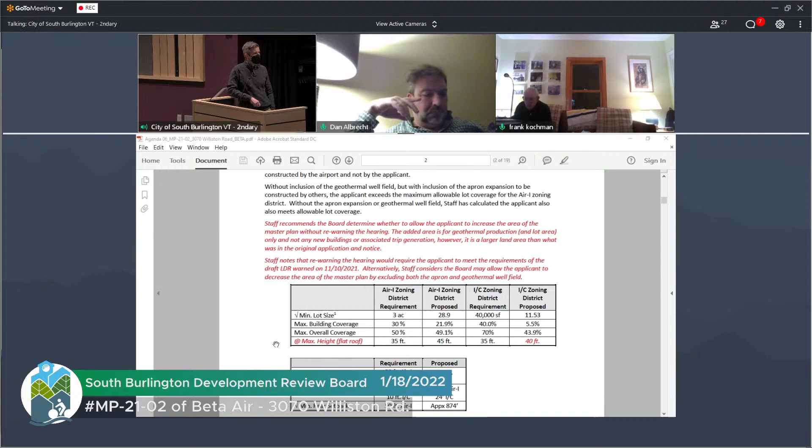I guess, and that's a really good question. My question in parallel to that is, what constitutes a material change, and does the well field actually represent a material change? There's no building. It's all underground infrastructure. Nothing can be built there. It seems that there's an unusually high burden being placed on this element of the project being material.

And that seems to be the cleanest path forward, to move in the direction which was intended with no impact to any of the other regulations we're trying to support. It should be noted that in trying to create a net zero, very sustainable building, the geothermal heating and cooling system is way above and beyond what any normal project would do.

I do have some calculations that are slightly different, Marla, but I would still ask you to try to understand what is material in this instance, because it doesn't seem to pass that traditional material test.

Yeah, I think that gets to the crux of the question, Art. I think that's well phrased. So board, what are your thoughts? How do we get this to a passable condition?

Well, look, the environmental court has been pretty generous in allowing what looks like a pretty big change as immaterial. The question for me is, what is the purpose of the warning? The purpose of the warning is to let people who might be interested persons know what's going on. Is there any other purpose to the warning?

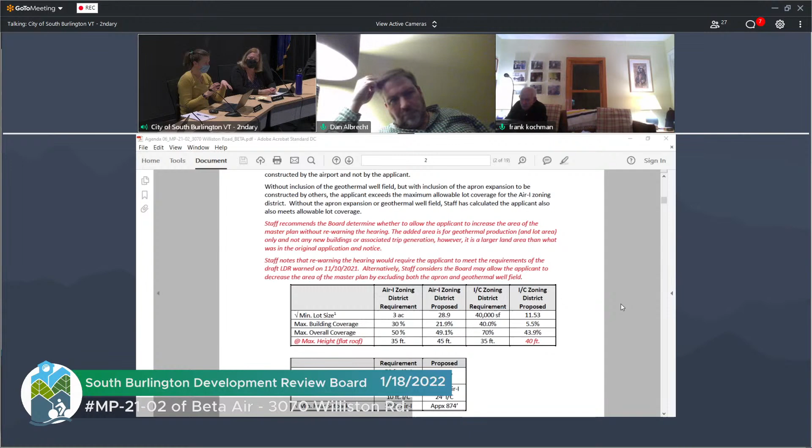Right, because underground it remains around 55 degrees. It's like a thermos, like a radiator. You pump the water down, and it gets hot, and then it rises, and it heats. Fundamentally, you're taking groundwater, you're heating something in this pipe. It's a closed loop system relative to the temperature of the ground. Depending on the time of year, that fluid is going to be warmer or colder than the environment. And it's used to either cool or add heat. It's a closed loop system.

All right, and I'm happy to... go ahead, Frank. Frank, did you start to say something? I've got something on this, Frank, if you can pass the baton to me.

Sure. I guess one of the questions is, when things are warned, it's not only about the presence of a physical building, it's also oftentimes people are more worried about construction activity. So I get the point that in the end that stuff would be underground and not that visible, but there will be construction activity. That's the other thing neighbors often say - I don't necessarily mind something being built here, but can you not work on the weekends, or can you watch the blasting activity or whatever? So I think that's the other standard we have to think about in terms of adequate warning.

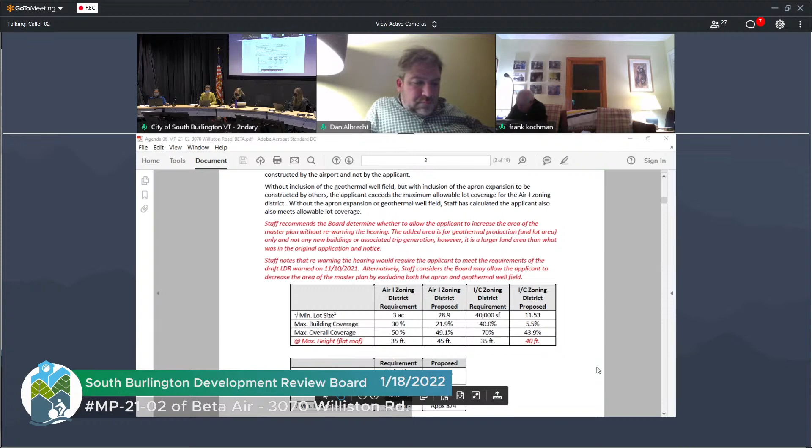I agree with what Frank just said, with the caveat that I think it's sort of an impact that's different than the proposed change here. It's already been warned about this project, so people are on notice of the project. It's whether this change would make a different impact. And I'm not sure whether this helps or not.

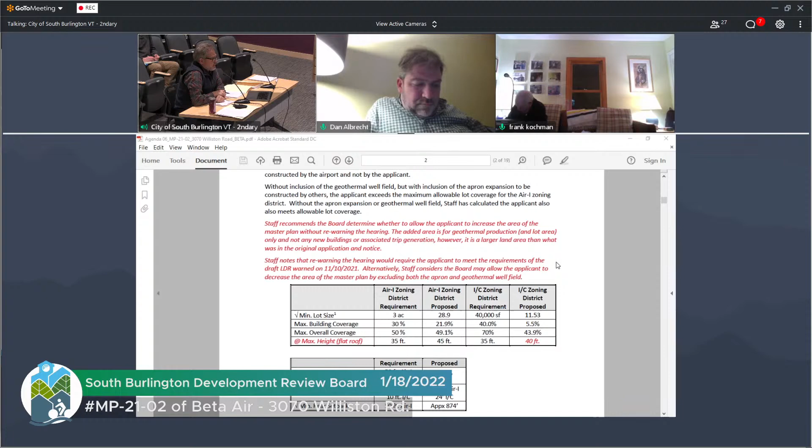The geothermal well was warned under the preliminary final plat, SD 21-28. In the location that it's in? That's correct, yes. So we didn't mention it in the warning, and I don't think that...

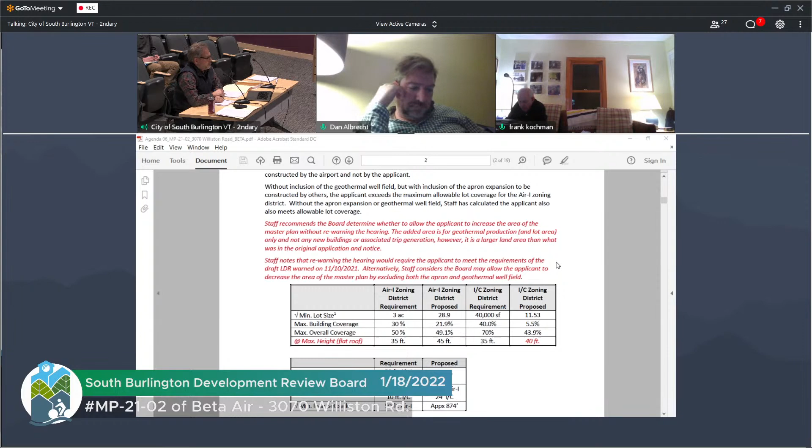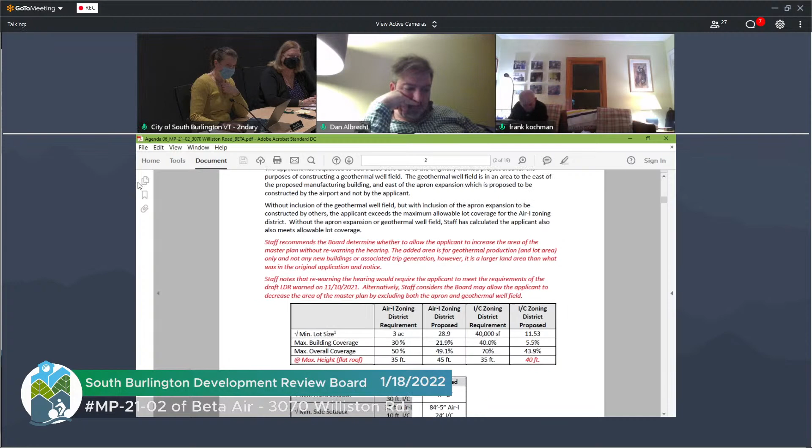I still haven't found it on the plans. I don't mean to be a jerk, but aside from the plan you submitted that showed that area, I'm not seeing it on the plans. It should be shown on the site plan, not on the master plan, but on the site plan for the preliminary final plat application, and referenced in the application.

So if I go to, I'm jumping ahead to the packet for agenda item number 7, and I'm on page 10. Oh, I see, there is an area that's shown as geothermal. Yeah, see, that just didn't stand out to me, I guess, because it looks like a construction hatch or something. But I don't mean to criticize, I'm just saying it didn't stand out to me.

It's also discussed in the narrative as well. I think we have a section talking about it. So does that mean it was warned? I mean, it was in the project, and it did not rise to the level of these project descriptions are a paragraph long. Sure, and we mentioned as much as seems appropriate, but it did not rise to the level of something to mention in the preliminary and final.

So now that we've established that it's been warned, you are still exceeding the area of the master plan, aren't you? Right, because this 2.33 acres wasn't in the area of the master plan.

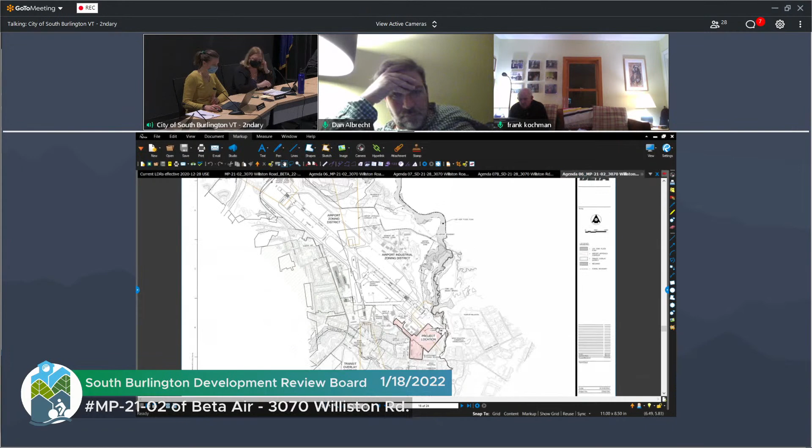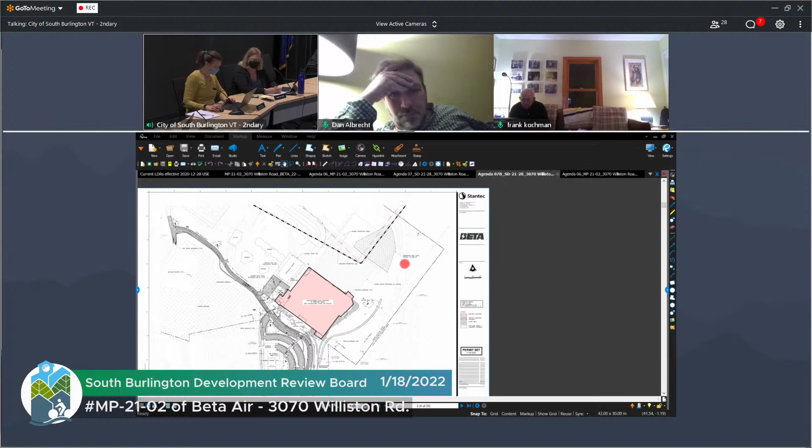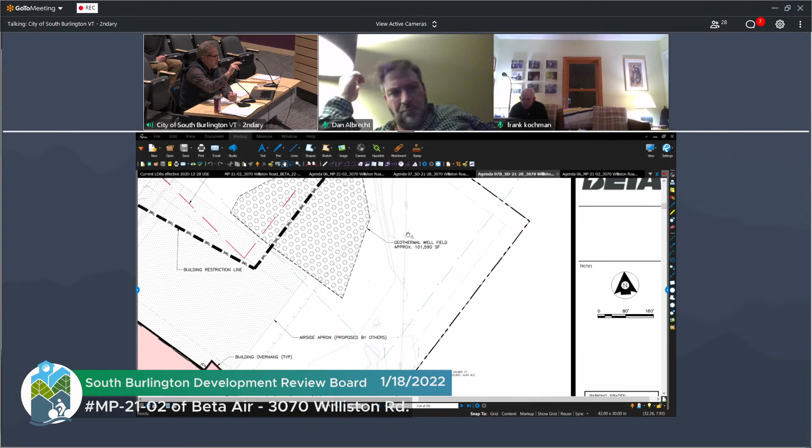However, in the preliminary and final plat that was on the same night, if you go to the site plan, the pink area is sort of where it ends here. This triangle hatched area is the geothermal, and it's clearly labeled as geothermal. This is a challenge with master plan documents, the scale of them, and the non-technical nature of the depiction, because if you scaled the actual outline of the project location shown on the project location map and overlaid it here, half of the well field would be included and the other half would not. The boundary would not be at the lower edge of the well field as shown on the screen right now—it would cut right through the middle of the well field.

But the whole idea of a location plan is to provide a general reference, not specific detail on where that actually occurs.

Okay, go ahead, Frank. I'm sorry to be struggling so, but would the reader of the original notice for this hearing, going online, have found this plan we're looking at right now by digging through the packet, the information available to that person?

This information has been available in each of the submissions, as well as noted in the narrative that geothermal was part of the project.

Yeah, I have to agree, Frank. This is Marla. If I were an average person and I cared enough to wonder what's going on in each of the areas shown in pink, I would probably have flipped to the other plan set, because there's no detail in the master plan set. So if I wanted to know what's happening in this portion of the pink area or that portion, I would have had to flip to the other plan set, and then I would have seen there's a geothermal well field.

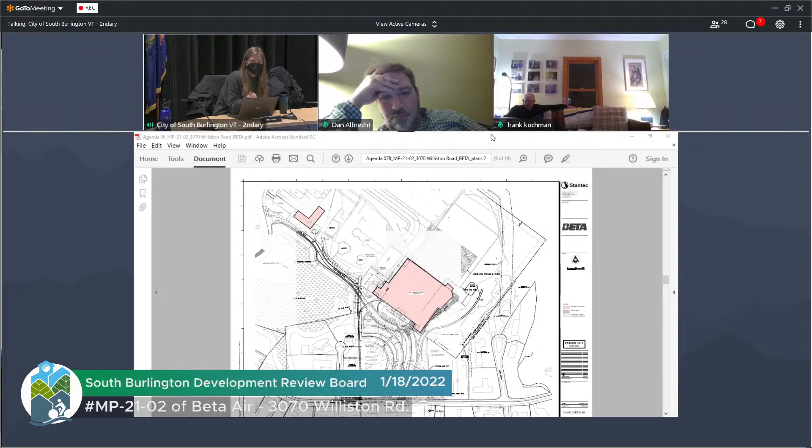But the perimeter - yeah, that's what I'm wondering - the perimeter is still one of the primary portions that's supposed to be defined in the master plan, and that's being proposed, for lack of a better word, to be expanded still. I mean, that's been... yes, that's one way to say it. I would suggest that we're trying to align the information that has been presented, that there was, again, through a series of discussions on both sides of the table, that we ended up where we are today.

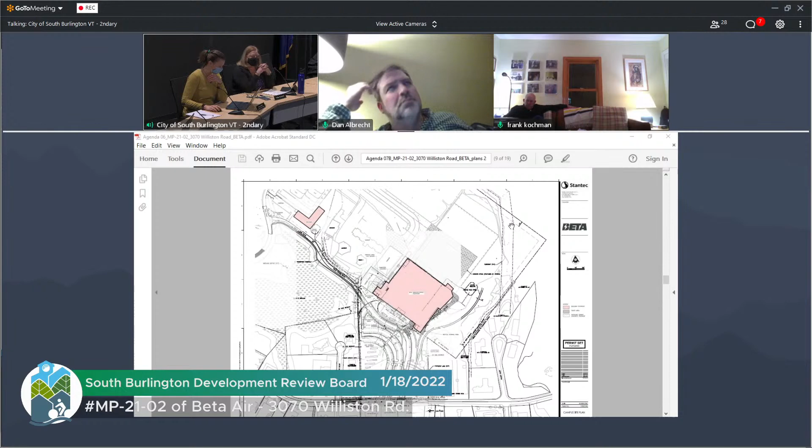So I don't know if this is going to be helpful or not, but I'm going to say it anyway. Maybe Delilah, I can bring it up while I'm reading it. I'm going to read - yeah, I think I can just bump you. I'm going to read section 4464 of the state statute that I've highlighted here on the screen. This is about public warnings.

The state statute says: no defect in the form or substance of any requirements in subsection 1 or 2 of this subsection shall invalidate the action of the appropriate municipal panel where reasonable efforts are made to provide adequate posting and notice. So this section is all about notice. And if you basically did your best to do the public noticing - most of these things are about where you shall notice it, who you shall notice - if there's any defects, but you made a reasonable effort, then it does not...

Invalidate the action. Excuse me Marla, I'm reading the next sentence. And we go back to the point of materiality, don't we? However, the action shall be invalid when the defective posting notice was materially misleading in content. So thank you for bringing that section up. We now have, by statute, what our standard is for making the determination: was the notice - assuming it was a defect - materially misleading in content? Right, that's the question. So that's where I started, and that's where I end up.

Is it material? I'm not entirely clear about it. It doesn't... my tendency is to think not, but it's still fuzzy to me about what the implications are for coming up a couple of acres short. That's what you're talking about, right? The master plan is short - it was warned as short on acreage. Is that it? Yep.

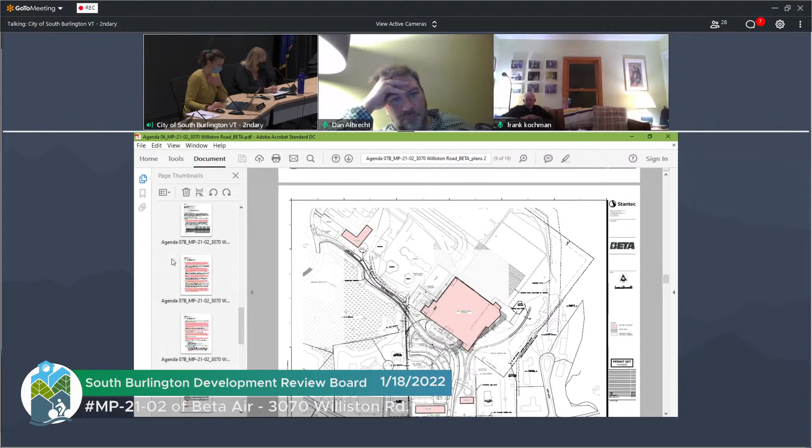Now, how do we fix this? I sort of wrote the staff report in two ways at the same time. I anticipated that you would either say it's not material, we can go with the additional 2.38, or you have to remove it and the apron. So you picked way number one, so we'll just go with that, and the staff report's all set up for you to keep going. Hallelujah, thank you.

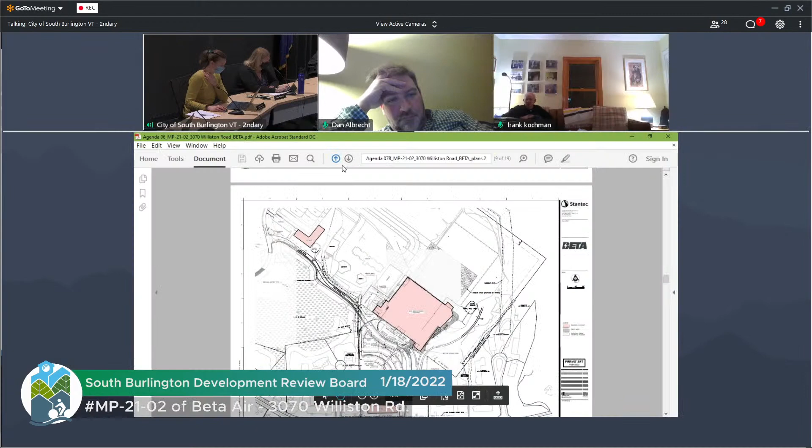Okay. The next page under staff comment 2, floor area ratio, staff recommends the board focus on the explanation of unplanned square footage, not on the calculated FAR.

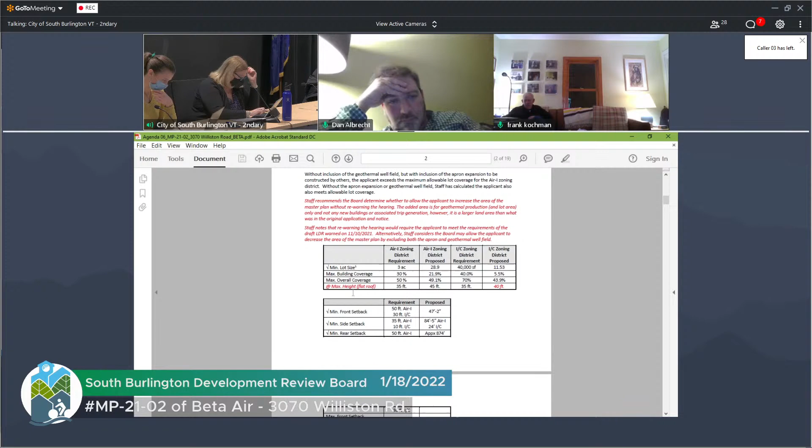If it pleases the chair, I think we skipped an item before that, the height waiver request, to close out staff comment number one in the table. Maximum height, flat roof. Staff's comment was that staff recommends the board decline the height waiver request as part of the master plan, but allow the applicant to make the request on a phase-by-phase basis.

I don't see where that is. Well, it's on the screen. Did I? And this was in the staff report for the previous hearing as well, and there was no discussion of it, so that's why I left it, because I thought everyone was good. Oh, so this is unchanged. So we're all good with this?

Well, in the interest of moving forward, since it doesn't impact the main project that the SD 2128, I would say that the purpose of the master plan is to provide predictability for the applicant, and if the city is considering, as has been discussed previously, the adjustment in the height waiver to recognize that current building standards don't allow a three-story building to be built within 35 feet, that also be part of the master plan, so that when we come in for future buildings, it's by right and not something that has to be requested. And if that seems like too big of a hurdle, then for tonight, we'll work with staff's recommendation.

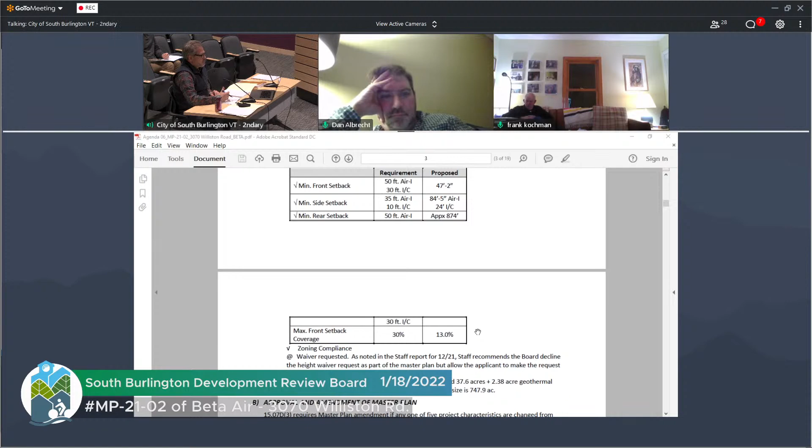Right, what I'm really saying is I'd like to have the discussion, I just don't want to take an hour on this point. I'm okay with staff's comment and recommendation to move forward. If this seemed like something that the board was inclined to move on, the waiver request, then great, and if not, then we'll move with staff's recommendation.

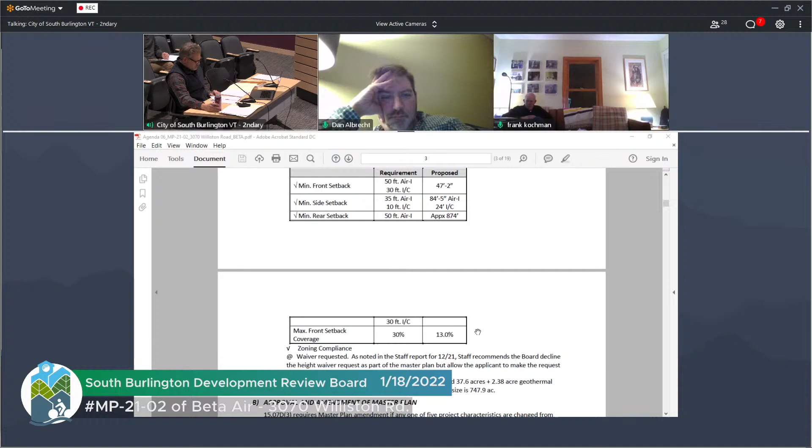So does anyone, thank you for that clarification, does anyone on the board have an issue with this? I would like to support the staff suggestion. I don't think it belongs as part of a master plan. Waivers should be building specific. When we see the details, there's more to it. We got a whole building to consider, right?

So I would decline at this stage, and they're free to request it when they come in with an actual building. Okay, and that's what you thought we agreed upon. Okay.

Any other comments about that, or shall we just let the language stay? I know that doesn't help you. No, we're happy to let the language stay. Okay, we'll take it up at the appropriate time.

Everybody good with that? Okay, now back to the explanation of unplanned square footage. Can you tell us about that? Art? Or team?

Yeah, so staff did a great job here providing some alternatives to our request at the last hearing, which was a variable FAR depending on the zoning district. We understand why staff is looking at it this way, and if at the board's discretion and pleasure, it could find its way to the 15% as recommended by staff, then we're happy to also accept that and consider this item closed.

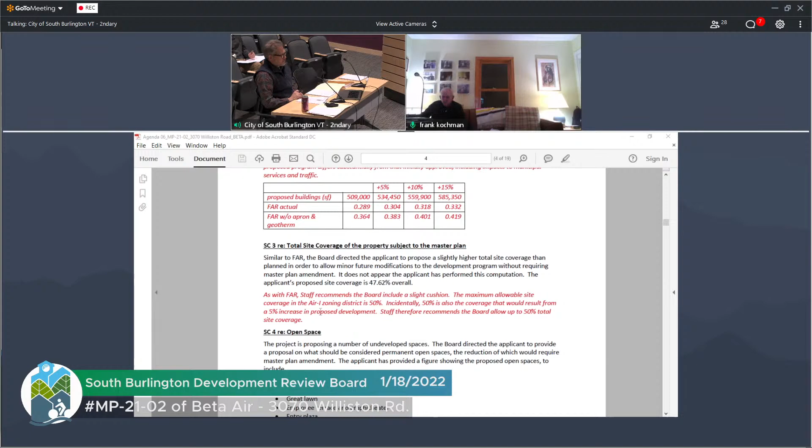Staff therefore recommends the board allow up to 50% total site coverage. Does the 5% cushion cover this? This is complicated. Here's what happens with the standards: you can give us the 5%, but if we can't meet the other requirements when we bring a building in, none of it matters. That's the test we're going to be held to. So there's no jeopardy here in where you're at right now. So are we good with staff comment 3? Yes.

Thank you. All right, next page, open space. Based on discussion of the board, staff anticipates the board may wish to exclude the sculpture lawn and entry plaza from permanently maintained open space for purposes of the master plan approval. But staff also suggests the board might consider a condition that the rec path be maintained as a public space. What do folks on the board think of this?

Do you want to show the open space plan? I believe it's on this page. If I may, the applicant supports staff's recommendation that that open space be maintained as public open space. And in fact, in all the work we're doing with the landowner, it is part of the public open space.

And board, what do you think about excluding the sculpture lawn and entry plaza from permanently maintained open space? I think that was Dan's suggestion originally, right? That though it is space, it's not intended as that sort of recreational space that's in the definition of open space. I don't know, Dan, maybe you can speak to that a little more.

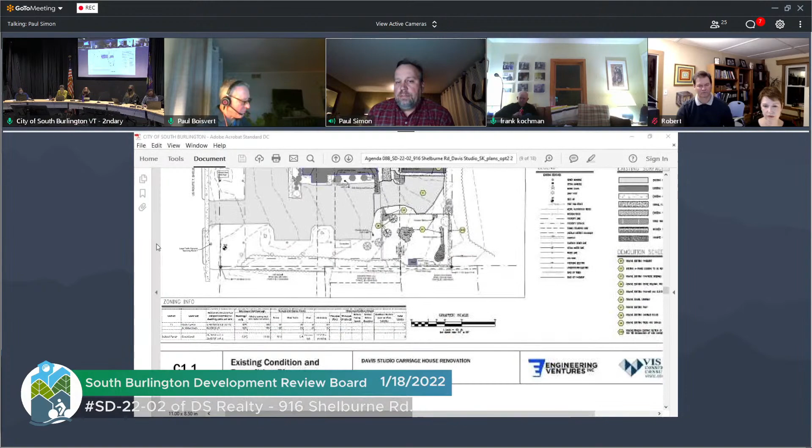And we're also providing a robust landscaping plan as well, similar to what we provided last year. We're just straightening the parking lot out to include that. It's a pretty straightforward plan just to extend that educational use to the back lot.

We don't see any big hiccups with this plan. It's really very straightforward. Because it's used as an educational use, we're under a tight timeline. So we'd like to also mention to the board that our intent is to come back and combine preliminary and final at your next available hearing, because we've got to get under construction and completed during the summer so that it is ready to go by September.

So I'm happy to answer any questions or go through any staff comments. Paul, I just want to correct that we do need to have that ready by June. Yeah, okay, even sooner. So, thank you for that.

I'm looking at the staff comments, and I think there were significant comments made about the historic preservation standards, but Marla, I don't see anything in red, which is how you usually indicate what the board needs to focus on or ask. Right, part of the reason that's so extensive is because we talked about it a lot at their previous sketch plan, so this is sort of an update. Okay, but if we don't need to talk about it, it's just more like this is where things are.

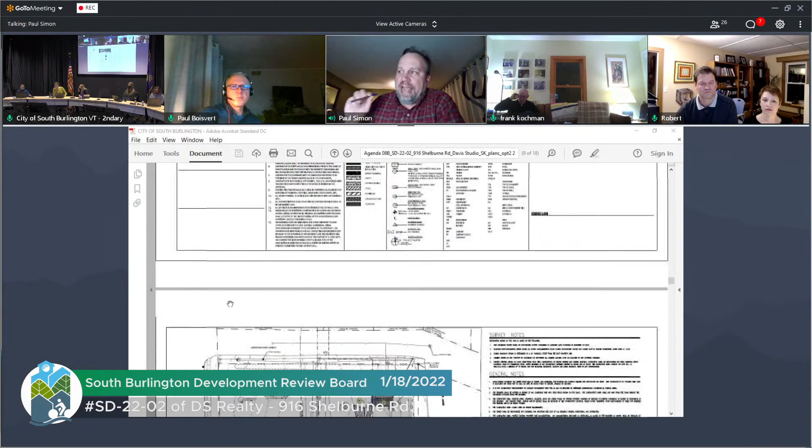So if you're turning out, the queuing is at the next intersection north of Lindenwood Drive, and during peak hours sometimes the cars are stacking further back. So actually it does the opposite - trying to get onto Lindenwood Drive and make that left turn is actually harder. Now, if we were to have to do that, we'd have to really change the programming of this site plan to include a drive out from this parking lot out north to Lindenwood Drive, which is a residential street. It really breaks up that field on the north side of the campus and the carriage house, which is for these young kids to play in. That's part of the programming that Davis Studio does - it's not just in the buildings, it's outside the buildings, and that's where all the teachers gather and they have outdoor classroom activities.

So, and that's just a beautiful space there that would have to be changed in order to provide an access drive to Lindenwood Drive. We just don't have the numbers either. This is a very small project.

We're still providing the same size building that's there. We are increasing the number of people using the building compared to the two residences that are there right now, but we're providing the parking that can accommodate that. And by straightening the parking aisle out the way we are in the plan, we're providing the stacking that's needed for the left-hand turn from our project. So, in my opinion, I believe we're doing everything we can with the project we're proposing. It's a very simple, straightforward project.

Okay, thank you. Just to chime in, I've made that left turn many times, and I want to reiterate what Paul said: if you had to turn left from Lindenwood, the suggestion would be accurate if there was a light there, but the light is just a little bit further up. So it cues back, and you'd never be able to turn left because it's blocked that much further. I don't know if I'm stating that very elegantly, but it would be worse to try to turn left without a traffic light than to come out of our space and turn left.

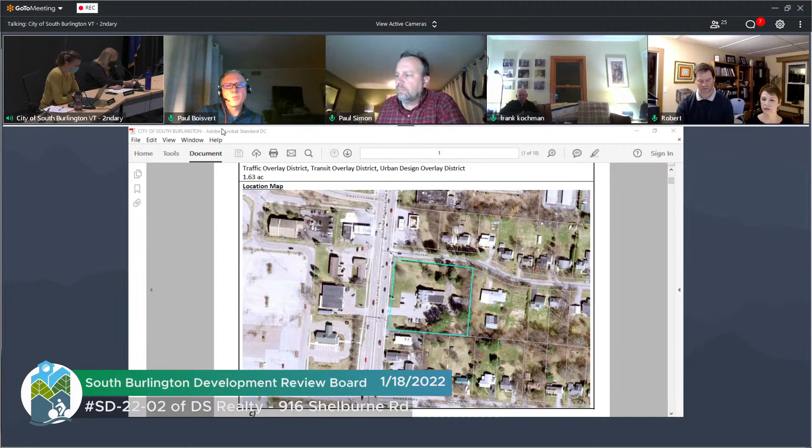So under the draft LDR, a master plan is required for multiple structures on a single user lot or complex in accordance with section 3.09. And 3.09 defines multiple structures on a single user lot or complex. As we discussed in relation to the previous application, a master plan is now a pretty heavy lift. It definitely changes the amount of effort required for a project. Staff did some pretty detailed analysis, and we think it passes the straight face test that this is not multiple structures on a single user lot or complex.

And I know that sounds ridiculous, but we think that given the proposed structure being 15 feet in height, about half the size of the principal structure, we can consider that an accessory structure, and therefore not subject to master plan. Just be aware, applicant, that if this is an accessory structure, it needs to stay that way. Otherwise, you do become subject to a master plan. So you aren't today, but just keep an eye on that. Okay, because that's the way out.

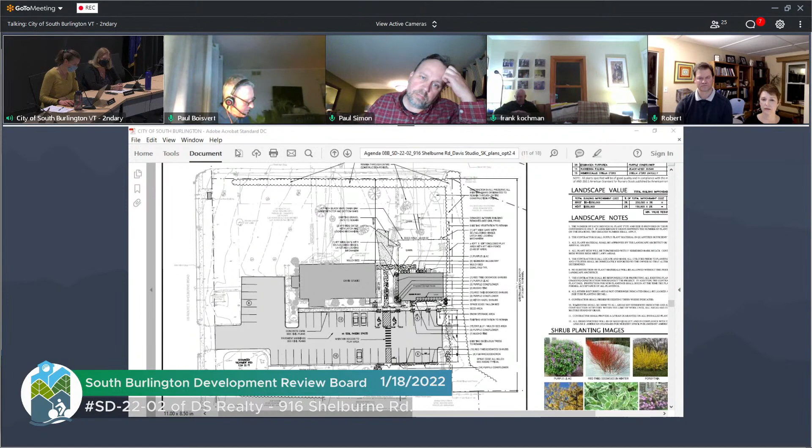Marla, I'm in sympathy with the intent, but why is an accessory structure not counted as a multiple structure? The definition in Article 3 specifically uses the term principal structure.

Well, it can't be more than one principal structure anyway, can it? In a single circumstance defined under the draft LDR, may there be multiple structures, and that is when it's a single user complex. And so this is a single user complex. I'm going to withdraw the question out of time considerations.

Okay, we can hash that out later. Yeah, this is sketch planning. It's a great conversation to have in a general way.

I agree. Is it also because we're extending the use, right? Because we're extending the educational use from the primary to the accessory. It's the same type use. If it was a different use, that may mean you would be required for a master plan, correct? Right, let's not get into it. Okay.

Okay, that brings us to the end of this staff report, and I think it's time to conclude this sketch for now, and we're going to ask for public comment. So let's take a moment and ask for the public's comments if they have any, and then we'll take a vote.

I did receive a public comment via email. It's in the supplemental, if you don't mind. And I received that this morning. Public comment.

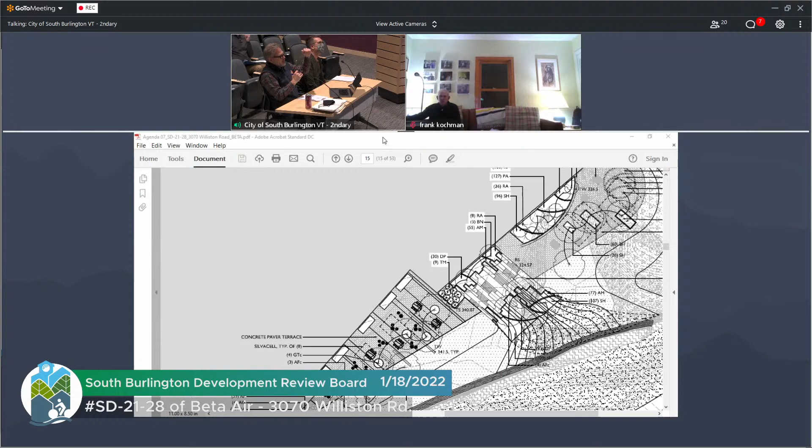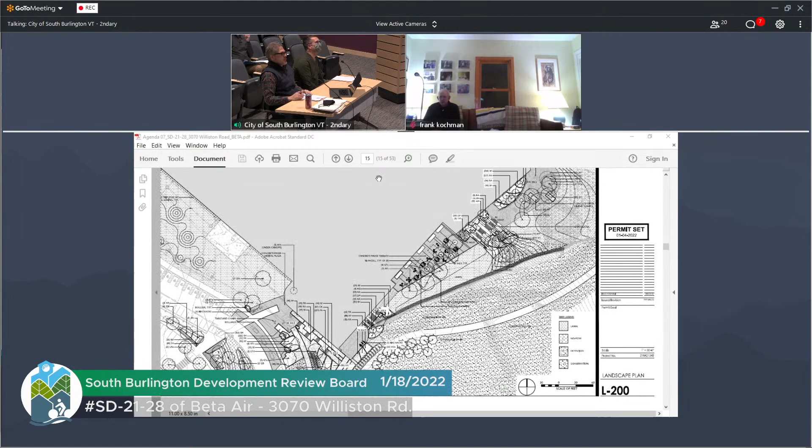So it's a series of steps and terraces, that whole center portion there. And sometimes the steps, rather than being step, step, step, step, there might be a step deleted so that it's a little higher in some sections, creating variety so that you end up with different types of spaces that people can gather on. Okay, or tiers, as Jeff Moore eloquently described them. Very good. Thank you for showing that to us.

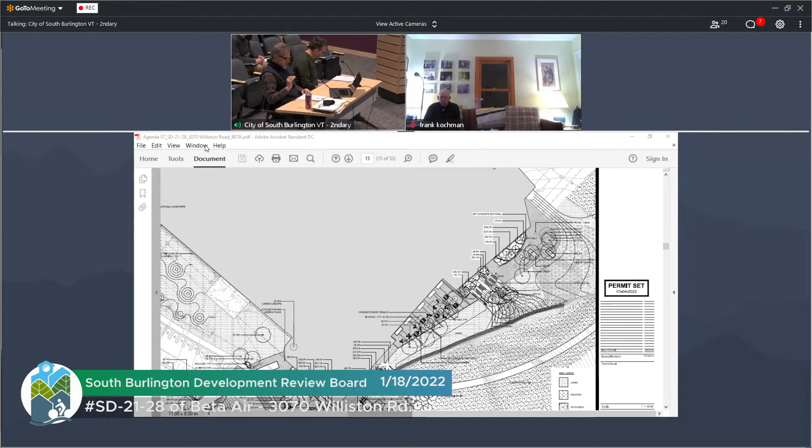There's a request from staff for supplemental photometric drawings. If we go back for a second, just to close out an item, there was a staff comment relative to the overall landscape budget we offered up, providing subcontractor quotes. There was a concern over the pricing. We're still more than happy to do that. It should be noted that right now, our design is 30% above what is required by the landscape budget calculation in the LDRs. So we're still more than happy to do what we said we would do. We just want it noted that we're providing a third more because it's the right thing to do, both for our employees and the community and the site.

So this comment is - we're a little unsure what the basis for the comment is. Which comment are you referring to, Art? The city arborist expressed that the value of some of the larger plantings should be justified.

Okay, I can provide a little explanation here. We normally go through item by item and say, is this allowed to count or not? In recognition that you are 30% over, we didn't really do that here. If we want to hang our hats on being well over, we should confirm that the board wants to allow credit for all of this list of things. But if we don't, and we want to approve the plan in aggregate, we should be confident that the values are not unfairly inflated. There's no benefit to us to inflate the values by a third of the total cost. We're doing it because it's the right thing to do for the site, for the employees.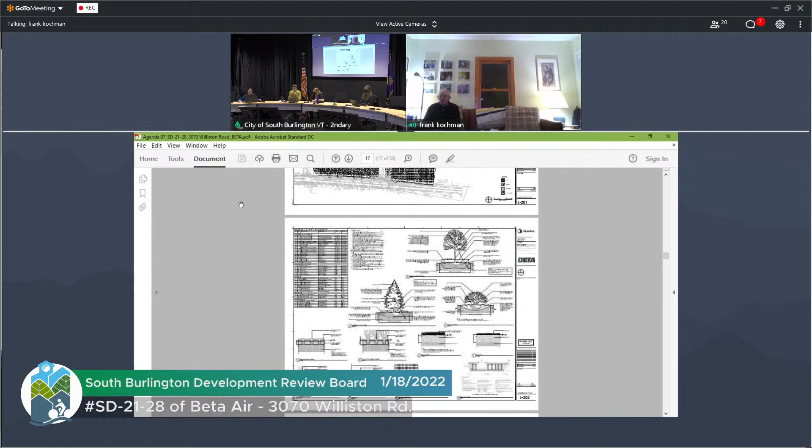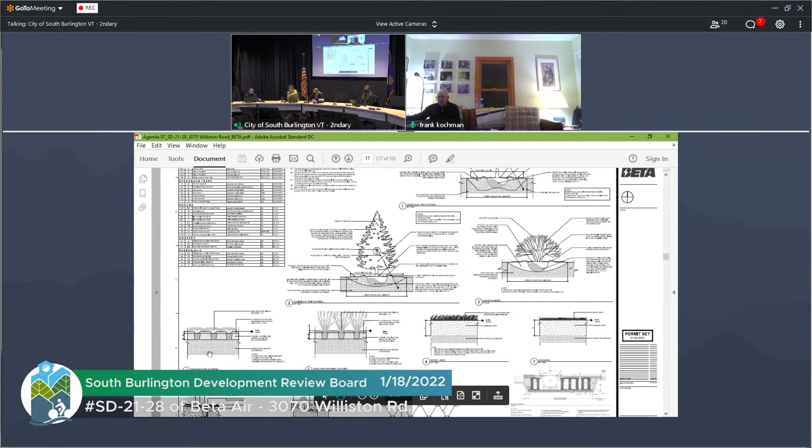I'm still trying to visualize it. Oh, you got a picture. Can you blow it up some? Bottom left, not the very bottom left? No, that's not it, just too zoomed out. It's on the right. Bottom right, part of my screen is covered up. Oh, it's this guy. Okay, yep, I see it. That's it, hold on. Hang on, we're zooming in, wait a second.

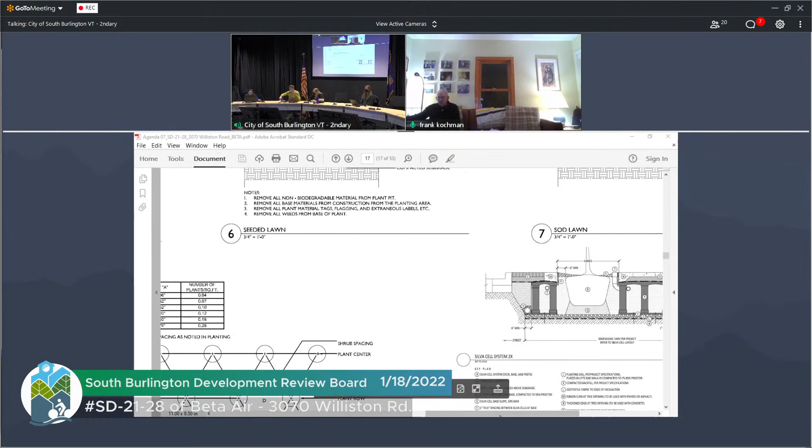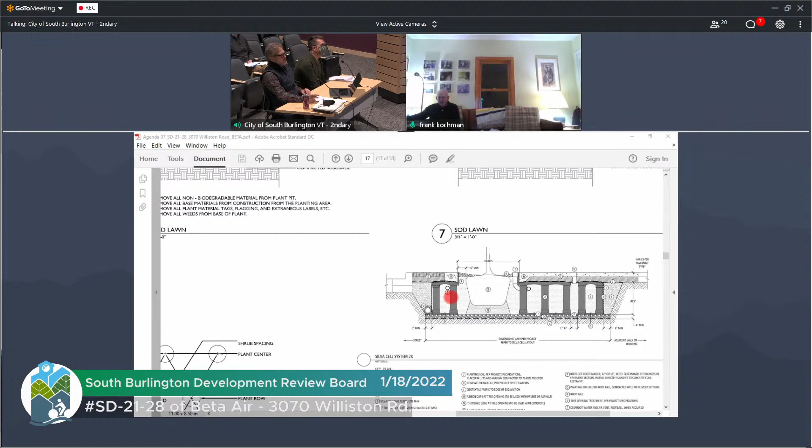It's basically these structural crates that support the pavement, and you fill them with really good, healthy soil. So the roots have open, airy soil to grow in instead of compacted, dense soil. It's a great idea. Are those arches? They look like Roman arches, more or less. What are they? They're just big plastic crates that allow space. Yes, correct. Instead of the soil supporting the pavement, the structure supports it, and then they're filled with soil.

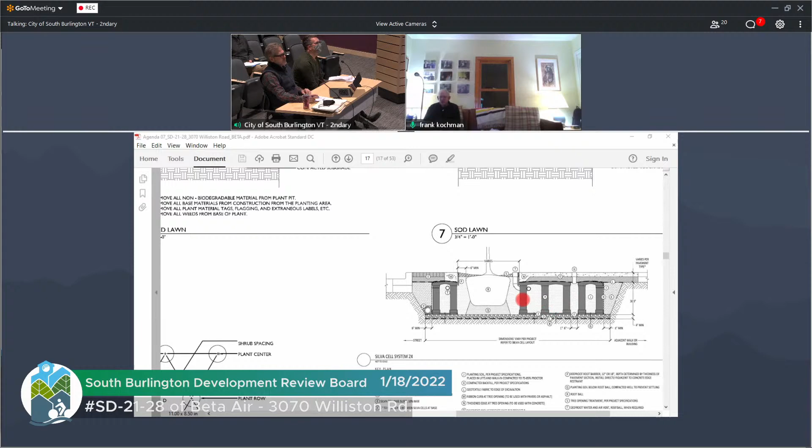And the roots of the trees grow into that soil? Yep, right across through those arches. I think you were not at the meeting where they talked more about this, Frank, but it was pretty impressive, though they are very costly. But I guess they've been shown to be very effective too. Well, it looks and sounds cool. If it works, that's great.

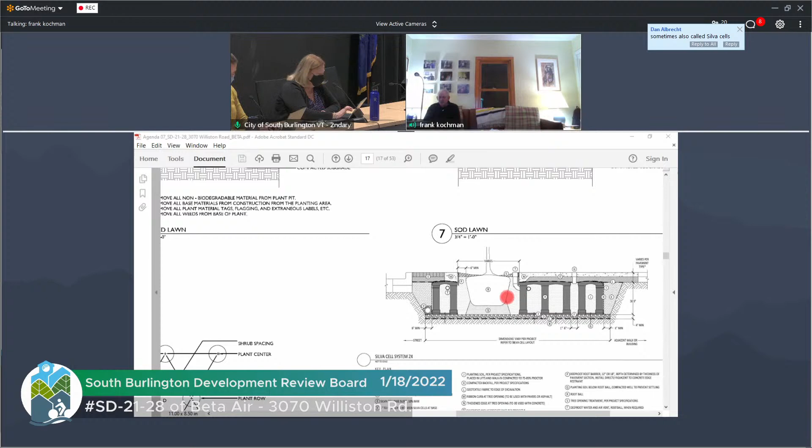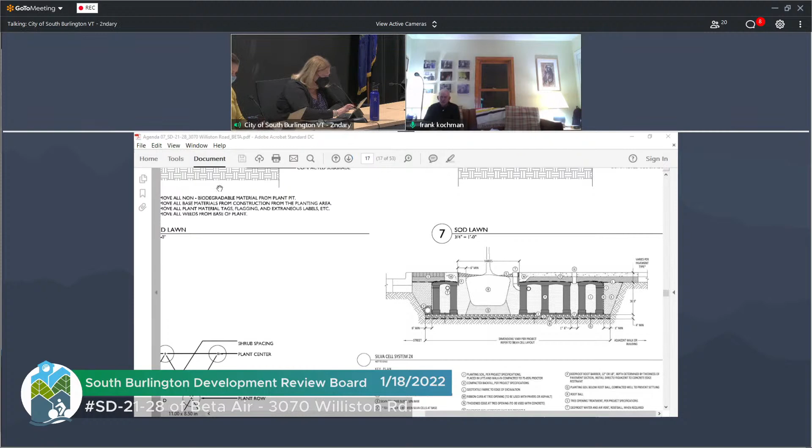Okay. Okay, moving on. Nope, we've already covered that. Actually, could it be?

Long-term bicycle parking — there was a request to have it shown on the plans, and staff recommends a different type of bicycle rack, which is what we typically recommend. Is that something you folks can address? Yeah, we can walk you through that. Do you want to walk through staff comment 18 and 23 before we get there?

I don't seem to have the same numbers you do. Staff comment 18 and 23. It's not in red, that's what's throwing me. Staff comment 18 is not in red. You're correct. Staff comment 23, at least in the version submitted to us, was in red.

Staff comment 18 had to do with V-Trans and the questions they had asked. We wanted to note that we responded to the V-Trans questions, resolved that, and provided calculations for their benefit on how we determined the length of the left turn and the taper length. So we completed that and provided the detailed information. The second part was to note that we still believe it's prudent to put a stoplight at that proposed intersection. We understand V-Trans has the ultimate authority on that decision, and we wanted it in here for the record, and we'll work with them.

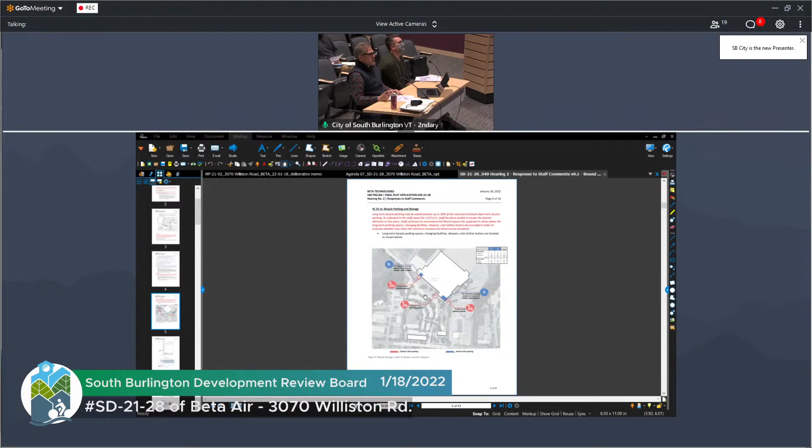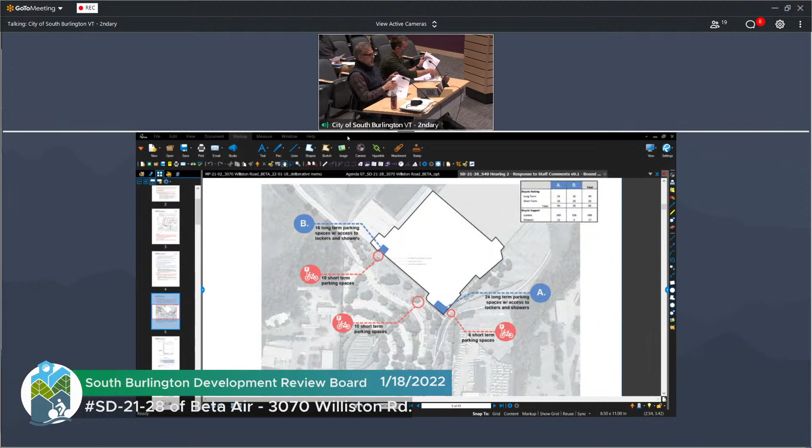So what you see here are the bike parking strategies, and the red dots, the red bubbles, are the exterior short-term parking spaces, and the blue dots are the long-term interior storage, locker, or shower locations. Now if we go to the next page, that's your overall plan, and then we have a series of graphics that delineate each of the locations, which is the response to staff comments. Here's a floor plan for level 1, the lowest level in the building, and we're going to walk through entrance A, which is the southeast entrance.

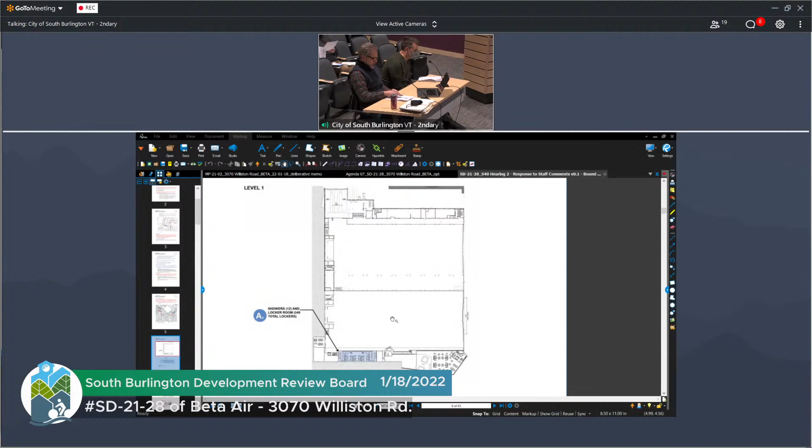The first snippet there, that blue dot, shows you where the locker rooms are located, and then there's an enlarged plan just below that to show you the detailed design for the lockers and showers. They're combined in that location. So what you have is the overall plan, and then an enlarged plan showing the detail for that area. So there are your lockers and showers as part of the southeast entrance.

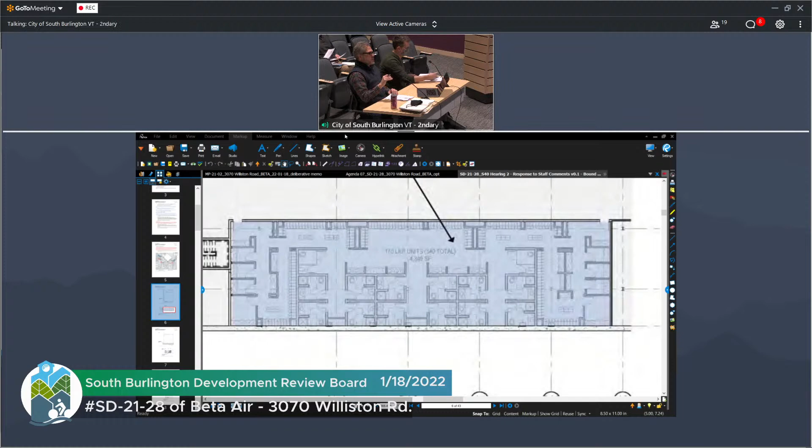And that correlates to the table we had before, where we had 496 lockers and 17 showers in the overall project, and this is the first part of that. So if you go to the next page, this is the lowest level, down at the airport level. The actual long-term storage, the bike storage for this entry, is 2 levels up at grade.

And if you just scroll down a little bit, you'll see a detailed plan of this. So as you enter the building, you can see where the entry is designated on the bottom. Just to the left of that are the long-term bike lockers, storage areas. So that's entrance A.

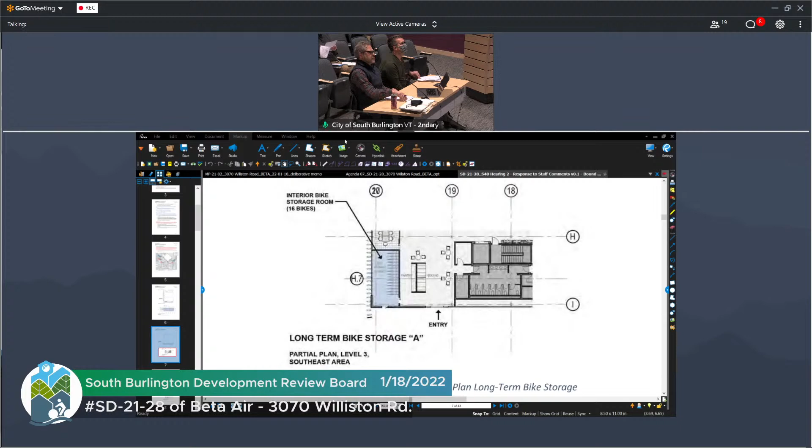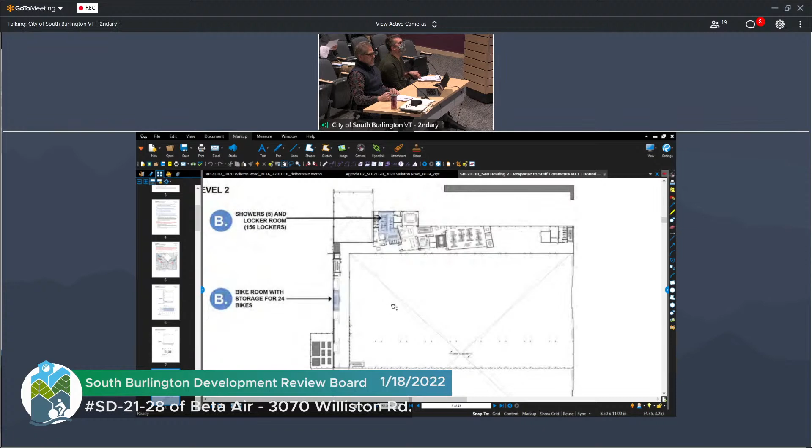We also have similar lockers, storage, and showers, changing areas for the northwest entrance, or entrance B, which is the next page. So that's the overall plan, and if you scroll to the top a little bit, you can see the arrows starting to show. There's your bike storage, the bottom blue bubble; the top blue bubble is your locker rooms, changing facilities, and showers. And then at the bottom of the page is a blow up to show the detail for those elements.

Great. Thank you. So based on staff comment, we believe that we've provided the additional detail requested. If not, certainly let us know.

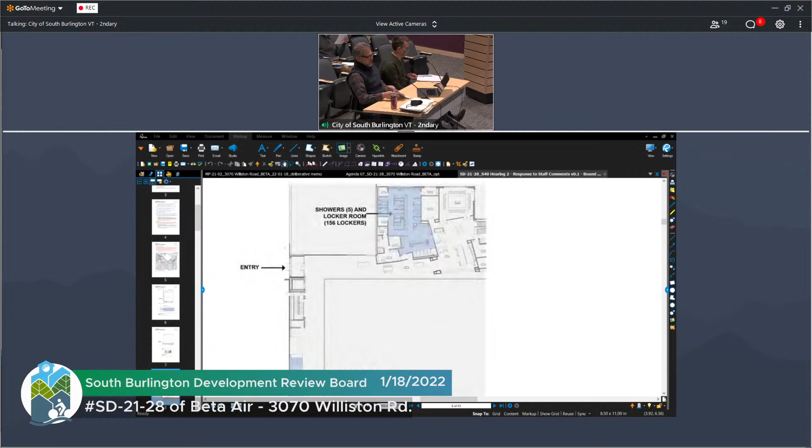So the outside bicycle racks, are you going to change them? Yeah, so I know the one that we originally submitted, there was a comment about it not being durable, which I wasn't clear on. It's stainless steel and it's an inverted U, but Corten steel. Well, no, the first one. Oh. Then we decided to just submit the one that you guys approved for the north hangar, which is Corten steel, but now there seems to be a comment about that.

Was it that you were concerned about the rough surface for bicycles? I mean, we're not going to be super fussy about this, but I think there was a pretty strong concern based on some experiences that you had, that Delilah had, that those original ones, something about the way they're built makes them not very good. So the bike rack we're proposing for this portion of the project is the same bike rack that was approved by the DRB for the project we just completed at the North Hangar. The Corten. Yep, that's right.

Now, you were concerned that the Corten steel might be too rough for bicycles? It's more a question, it's super nitty gritty. The city's really interested in improving non-motor vehicle access, it's one of the comprehensive plan goals. I just want to make sure we're not proposing something that's a non-starter, especially for such a large facility. I think we're looking at this a little more closely than we do on something that's renovation.

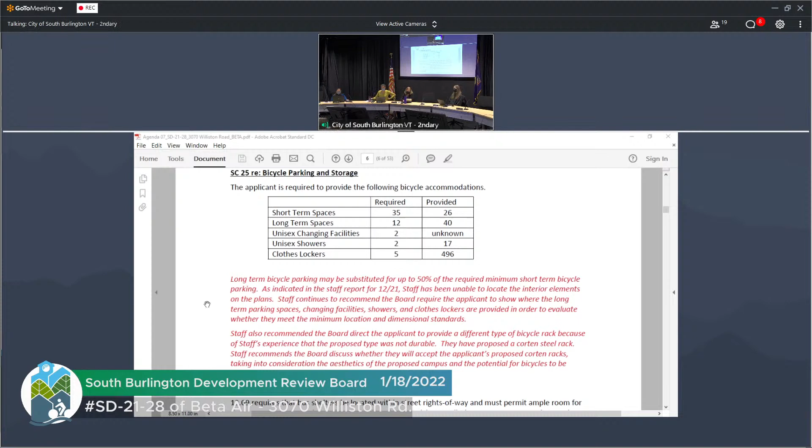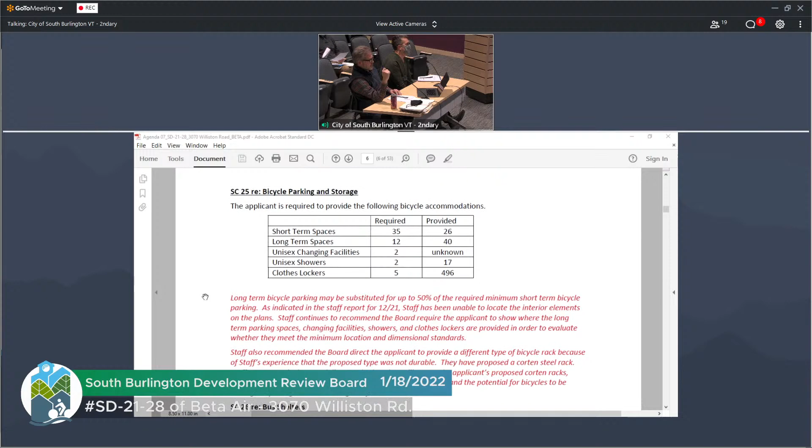I don't know, what's been your experience? Have you seen these in person? Are they okay? Would you lock your bike to one? Yeah, they're installed at the North Hangar if anybody wants to look at them. And in terms of durability, there's steel embedded in concrete. Yeah, and both the North Hangar building and this building have Corten steel details and elements in the architecture. Right, that's why we thought we'd just keep it kind of a standard, so.

Okay. And if it's of any interest, in the package we were just looking at, you'll see there's a cut from the Association of Pedestrian and Bicycle Professionals, APBP, Essentials of Bike Parking. Those are the standards that were used to design and locate the bike racks, the short-term outdoor bike racks that we have. Okay, thank you, that's good to know. All right.

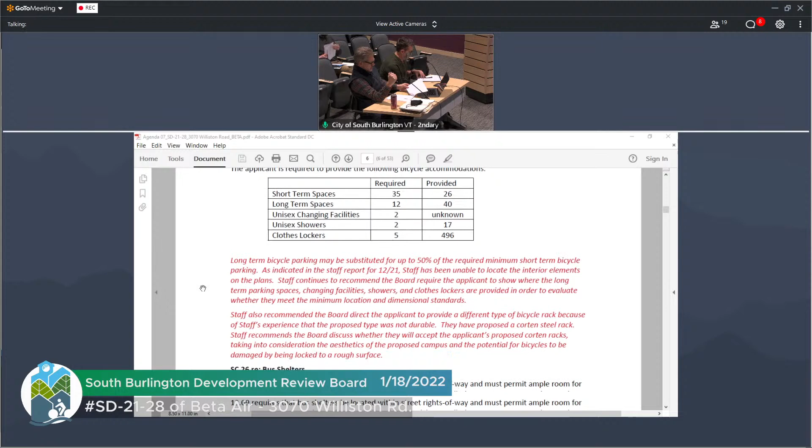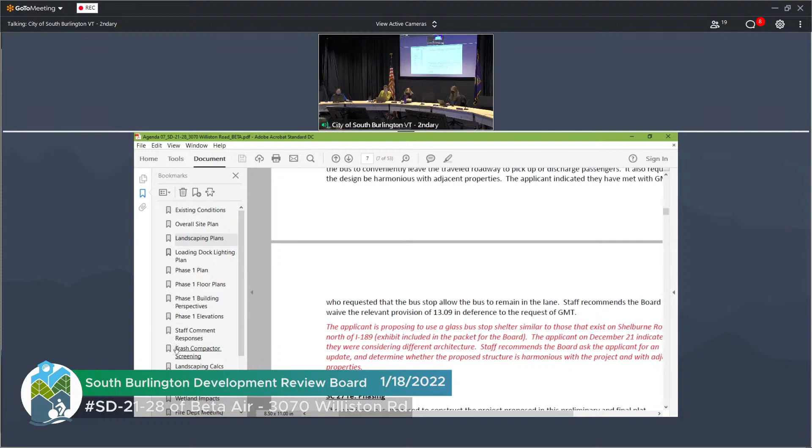Next comment, this is about the bus stop shelter. What are your thoughts about the staff comment, and how would you propose to make the structure harmonious with the project and the adjacent properties?

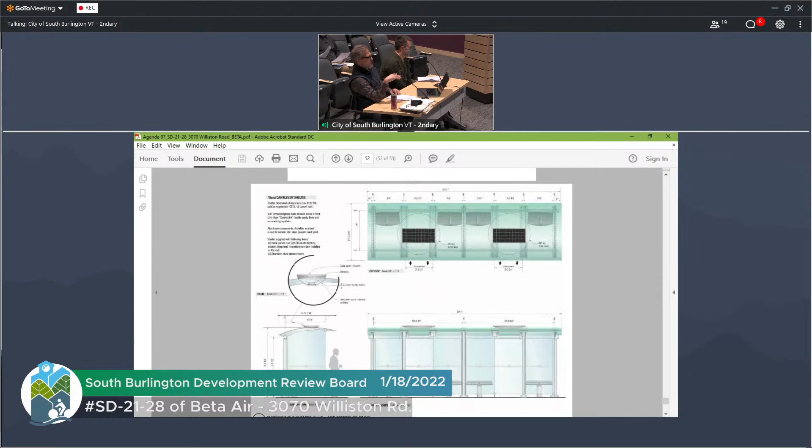Well, as it's designed, and as the standard for GMT, the nice thing about glass is you see right through it, and the context of the site is the context of the site. You're not actually competing with the other buildings or the landscaping around it, which is probably why GMT went with this sort of design to begin with.

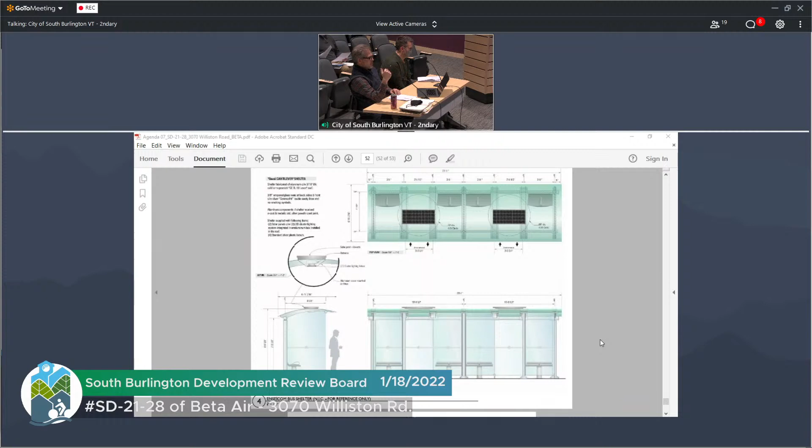Our proposal right now is to use this as our base design. This is what we're planning and installing. If we come up with something in the future that we'd like to supplement it with, we'll talk to GMT, we'll talk to the board, we'll come back. But right now, we're just going to be installing the GMT standard.

Board, can we live with that? Okay, thank you.

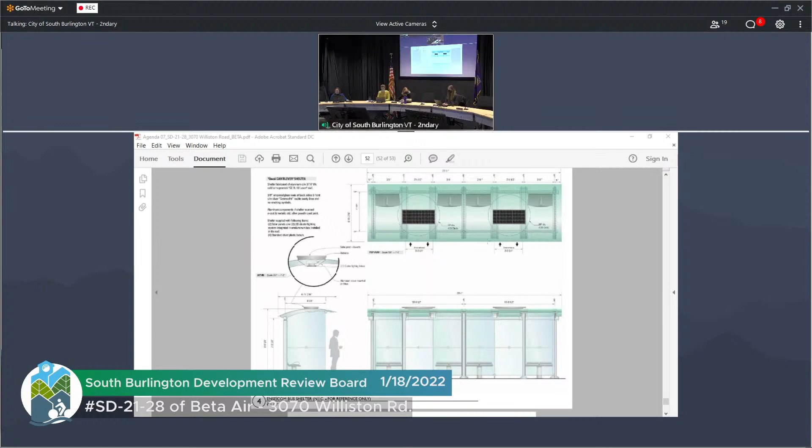And then there's one more comment. Staff recommends the board establish a timeline of 2 years after issuance of the first zoning permit for issuance of the second zoning permit, and ask the applicant to propose a surety mechanism for ensuring that the site is attractive should the second phase not be constructed.

Thoughts about that? Well, I don't know what it means. Okay.

Marla? I think this would be helpful to show, Delilah, this packet has bookmarks, and if you go to the bookmarks, there's one called Phase 1 Plan. Or phase 1 building perspective? Nope, Phase 1 Plan. Oh, there it is.

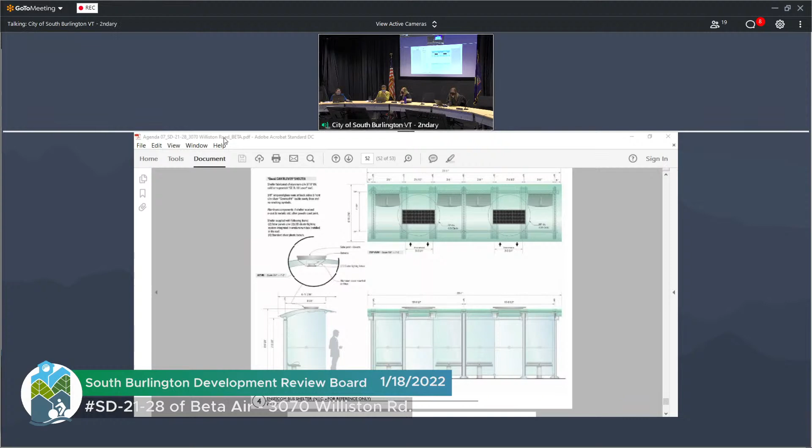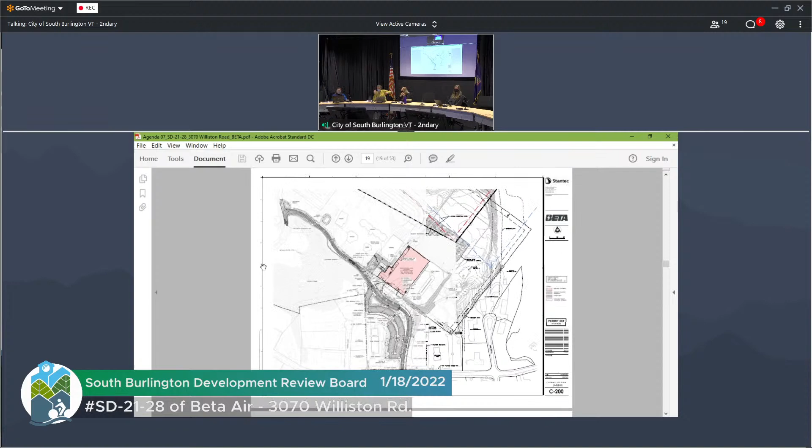So they're proposing to build the blue phase, as we've come to call it, in 2 phases: blue phase 1 and blue phase 2. The plan Delilah has up now is blue phase 1. Blue phase 2 is obviously all of blue phase. So blue phase 1 includes most of the parking, all of the access road, and half of the building, presumably half of the landscaping around the building.

It's actually a little bit more than half, because what's tough to tell in this drawing is the building, as it's highlighted, is the first phase. Just below that is the second phase, but if we remember, that's 20 feet down below. So what we've done is landscaped around that edge so you can't see over onto what was the old quarry, but it'll be completely improved because we can't leave it like that per the Act 250 guidelines. It's going to have to be at least seeded in grass, and so there's landscaping being added to be harmonious with what we're proposing for the rest of the site, as Marla just mentioned.

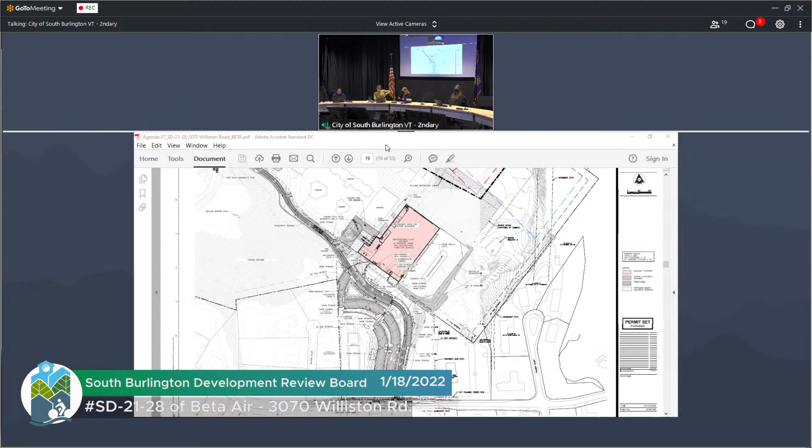So the staff comment here is, since the majority of the aesthetic elements of the building are proposed in the second phase, that big entry canopy, the lawn area, the apron in front, staff recommends the board impose a strict timeline for issuance of a zoning permit for the second phase, and consider requiring the applicant to establish a surety to improve the second phase should it not be constructed in the required timeline.

So the gist here is, you have a certain amount of time to apply to build the second phase, and if you don't, the repercussion is that we can pull the bond and fix up the site so we're not left with the appearance of half a building.

And I got the sense, going off script here, that your intention was to actually pull the zoning permits concurrently, but to get your COs separately. Is that changed? The discussion we had was we wanted to pull the zoning permit after a period when we could use the building and understand how we were going to adjust our processes in the second building, to avoid building them too close together.

It's an oversimplification, but think about it: the first aircraft that we build are going to be more hand-built. We're going to move into automation at some point, but in order to understand what we want to automate, we have to have time to go through that hand-build process to figure out the automation, design it, have it fabricated, delivered, and be ready to install in the future portion of the building. That time frame is more consistent with the discussion we had about the flexibility around the master plan during the previous application.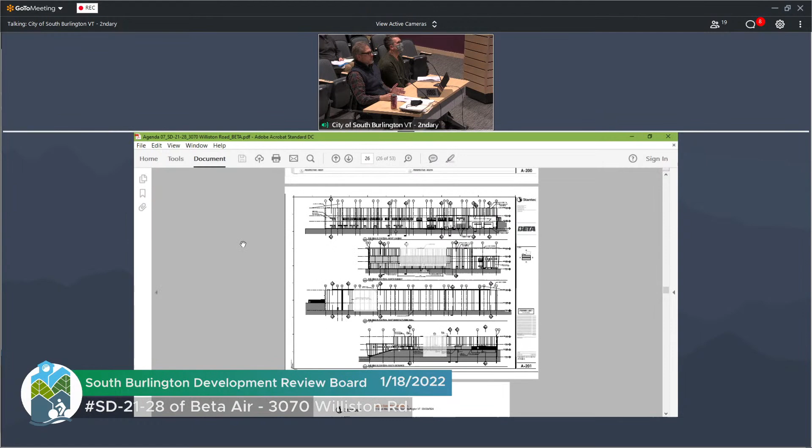When you look at the renderings, I don't think it plays as half a building. I think it plays as a very smart, very good-looking building that's going to be a nice entry as you're starting to fly in, approaching the airport from that southeasterly direction. There's been a lot of care taken by the architects to make sure it doesn't look like half a building.

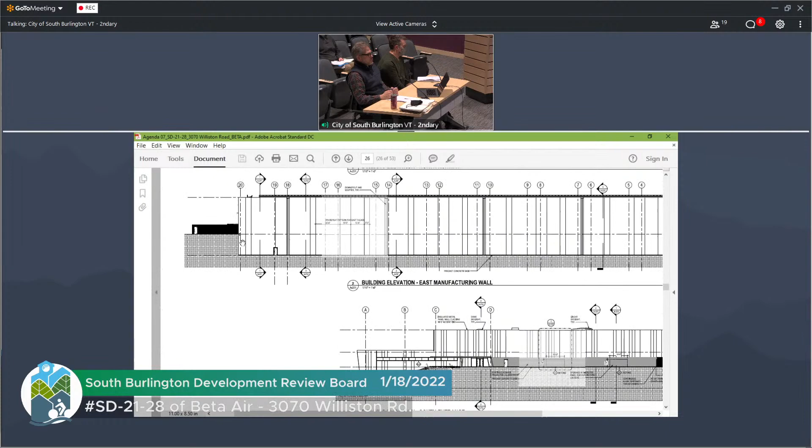So does that clarify the question? The question is, what should the timeline be for phase two? And should they be required to provide some surety to patch things up if phase two never happens? There's also a perspective drawing, Delilah, if you wanted to pull that up, the previous page.

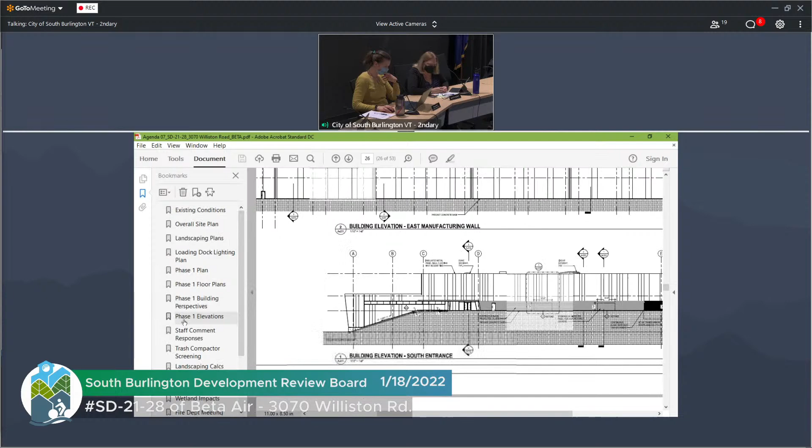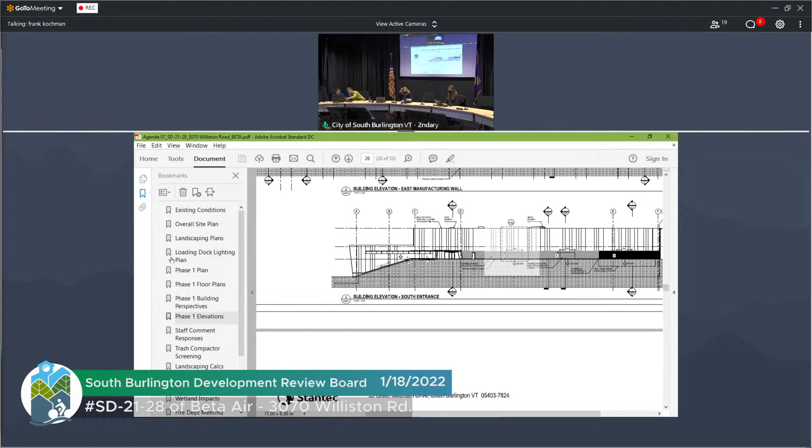My question was, I think the language was just loosey-goosey for me. You said make it attractive while you're waiting to do phase two, if you don't do phase two in time. And I was wondering whether you were serious about having that be actual language, or whether you could nail it down a little more so the developer would know what he's got to do. That was the question - what should that surety language be, if at all?

I don't know, how do you pin it down? Well, you could say you have to get a zoning permit within two years. You say you have to get a permit within two years, or else what? As we talked about before, at that point the DRB is driving business decisions.

The question I would ask is, are we leaving the site in substantially worse condition than we're finding it? And what is the benefit to forcing us to do a building if we may not be ready to do that yet, because we haven't been able to get through the gate of understanding what that automation looks like inside the building? So to compensate for only building half of the building, we're planting more landscape. We're doing a majority of the landscape, minus the Great Lawn, as part of the blue phase.

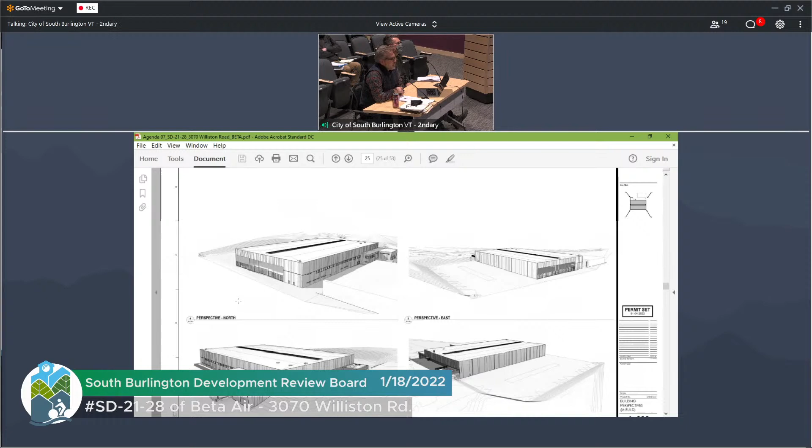All right, so let's say you don't do it - what happens then? The airport has a viable site for future development, and because that site is 20 feet below the landscaping where the majority of the landscaping happens, there's no immediate impact to the public or to anything other than providing the airport, the landowner, an opportunity for potential future development.

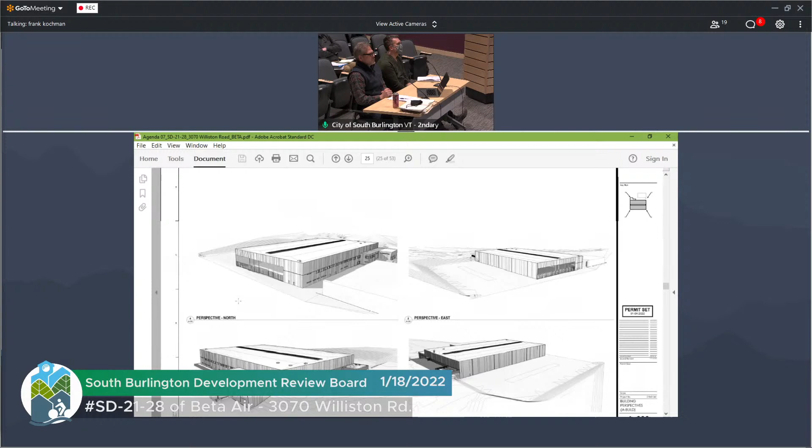Because of my limited visualization skills, I asked Marla, do you agree with that characterization, Marla? Or does something need to be done in that space? Art referred to - Marla, this is Jim. Can I just add to that?

I'm trying to come up with the LDR justification for the time limit. I'm reading your comment as saying that since the majority of the aesthetic elements of the building are proposed in the second phase, we should have a timeline. Right, because LDR 1406 talks about aesthetic compatibility and consistency between structures and site and structure to structure. So the question here is...

If they were only proposing phase blue 1, would they have an approval? And if so, then fine, there should be no limit. But if there are concerns that phase blue 1 doesn't stand alone, then there should be some constraints.

I don't think there is a phase 1 landscaping plan that I saw. There is, I think there is. Boy, so let me... we've gone beyond the 10:07.

We're so close. Well, I know we're so close, but I think it's probably not prudent for us to close this hearing anyways until the master plan has been closed.

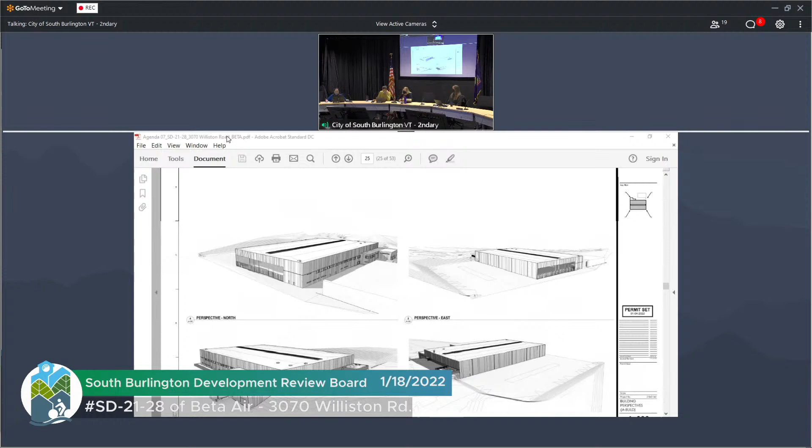Board members, challenge me on this. I'm wondering, since we're coming back again to finish off the master plan, could we finish off this conversation then? I would offer, before the board weighs in, that because we cannot get continued to the first hearing in February, delaying this, closing this application, waiting for the master plan, is going to significantly delay construction.

And if there is a path to closing this hearing, then we would request that happen tonight, and that we obviously will reconvene in mid-February for the master plan.

Well, let me ask Marla, is it possible to close this hearing? How can you, if delay in closing it... can you still hear me? Yes, everybody disappeared. Oh, that's because I disappeared, all right.

I don't understand how you could benefit from advancing construction by closing this hearing if the master plan hearing isn't closed. How can you do that, if the master plan hearing isn't closed, how is that possible?

The master plan's going to obligate us to things beyond... this is a subset conversation, right? The master plan's going to obligate us to things beyond this project. This project, as proposed, as submitted in this application, fits inside the master plan without requiring any waivers or deviations.

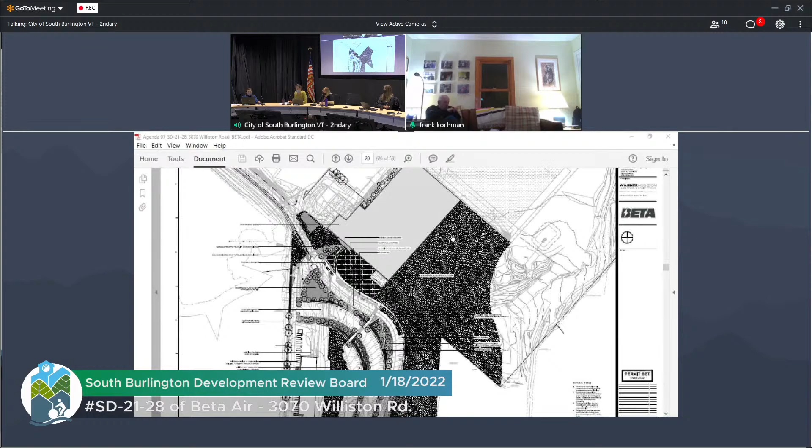Delilah did find the blue phase 1 landscaping plan. It's hard to read because there's a hatch for the grass that makes it look like a big black blur, but if you zoom in, you can see there's some trees along the front area that would be part of the first phase. The vast majority of the plant material is in the first phase; it's more hardscape and seat walls and things that are in the second phase.

Okay, thank you. Unless any other board members object, I'm going to say enough is enough for tonight. I know that's not what you wanted to hear, but I don't feel comfortable going till midnight and closing this hearing without the master plan being done.

So what I would suggest is we continue this to the 15th of February, and at that meeting focus on this last issue that we were talking about. Hopefully it'll be very quick, and the review of the master plan will be very quick, and you'll be on your way.

I guess I would ask if the board has any particular things they'd like me to focus on regarding this phasing question. I will do my best to write this as a decision with a cover memo kind of thing. If this is the only outstanding issue, if anybody has any things that come to mind that I should focus on, I'd appreciate hearing them now.